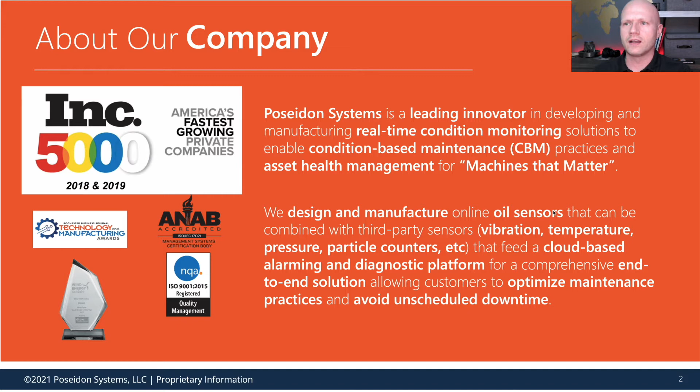I'm the Vice President of Industrial IoT with Poseidon Systems. A little bit about us: we're a leading innovator in developing and manufacturing real-time condition monitoring solutions, really focused around condition-based maintenance. A lot of our technologies and core competencies are around oil sensors and oil sensing technology, and how you integrate that back into the cloud and run diagnostics, providing a full end-to-end solution for our customers. That really allows a lot of our customers to use this information to optimize maintenance practices and avoid unscheduled downtime and other things like that. We'll talk a little bit more about that today.

For some of you, IoT might be a little bit new and you might not have a lot of background around that. As a summary, it's really billions of industrial devices connected to a network sharing data. It can be anything from a temperature sensor to other things within the industrial realm, connected back, sharing that data, and allowing you to garner some sort of value from it.

When we compare regular IoT to IIoT, the industrial IoT, a lot of people get confused. One real difference is that IoT is consumer focused, so you might be thinking of house automation or smartwatches. But in the industrial IoT space, we're focused more on cost savings and efficiency of industrial equipment—not so much for fun, but to help drive efficiency and improvements in cost savings within industrial equipment.

There's a lot of myths around IIoT. Myth number one is that it's new. It's not really new at all—we've had some sort of SCADA or other systems since the advent of the PLC a long time ago, and ever since that point we've been doing IIoT. Really, the change has happened as technology has advanced and it's become cheaper and easier to connect different sensors and devices back to a data collection point where you could aggregate and use that data. So the innovation in the near recent term was more about scaling the technology a little bit farther.

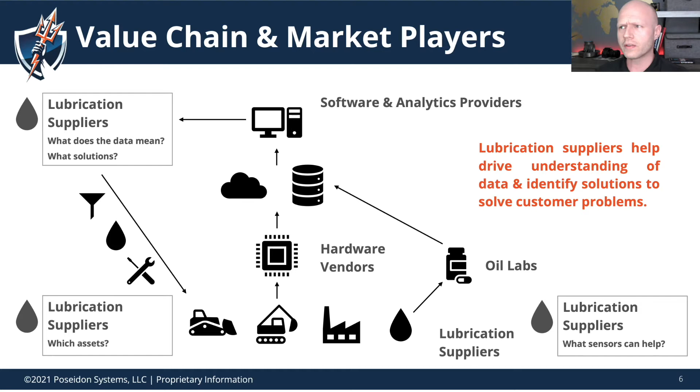And once you've identified a problem, again, lubrication suppliers inherently understand a little bit more about what solutions could be applied to fix the problem. Should you bleed the oil out, change the oil, do a top off, etc. Maybe even switch to a different oil for that application, given the information that's pulled back through the IoT system itself. So there's a lot of value within IoT at a high level.

It contributes mostly to the goal of reducing the total cost of ownership. One way it does that is by increasing process efficiency. Having that data more real time helps you be a little bit more efficient, as opposed to having more manual processes with technicians pulling samples more often.

The improved quality and repeatability with the sensors is quite nice in terms of making sure the data points you have are repeatable and consistent. Overall, it provides a better service to the end customers by understanding the assets a lot better, which can reduce the total cost of ownership as well.

Improving and helping with the troubleshooting and maintenance - the sensors inherently, and the data being collected, should identify more challenges or issues earlier to allow lower cost of replacement or help troubleshoot what's going on, as opposed to going into it blind.

Improving safety with less physical interaction between human and machine, being able to do some of that diagnostics remotely, reducing cost and downtime by catching things earlier and coming up with better solutions so you can reduce downtime in the future. Increased productivity and reliability is a big piece of this.

And then really in the end, extending the equipment and lubricant life. All the things above help do that more efficiently, and all kind of bleed in to help reduce the total cost of ownership by extending the equipment and lubricant life itself.

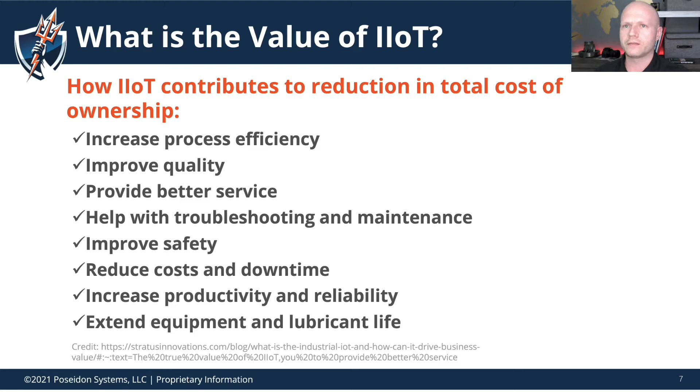We're trying to use lab analysis to help identify what the root cause is, to identify what's going on earlier, and supplement the value of what an IoT system can provide, because the lab utilizes over 150 different tests to provide accurate and repeatable direct measurements - exact measurements of exact properties or contaminations or whatever that might be.

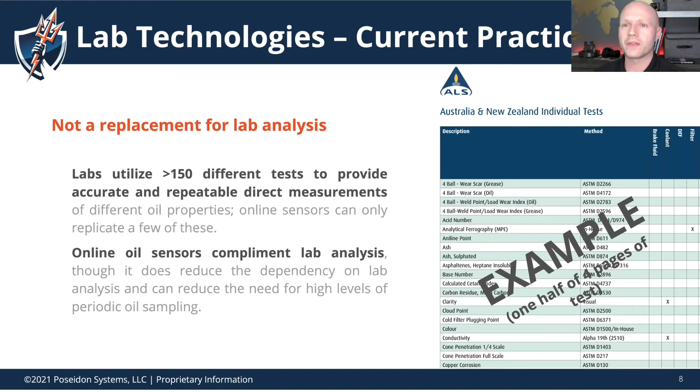Instead of trying to replace that, which can't be done today, we're really trying to complement the lab analysis by identifying sensors and sensor technology that give us the information necessary to understand that there is something wrong - not necessarily in each case exactly what's wrong. I'll show a couple examples of that.

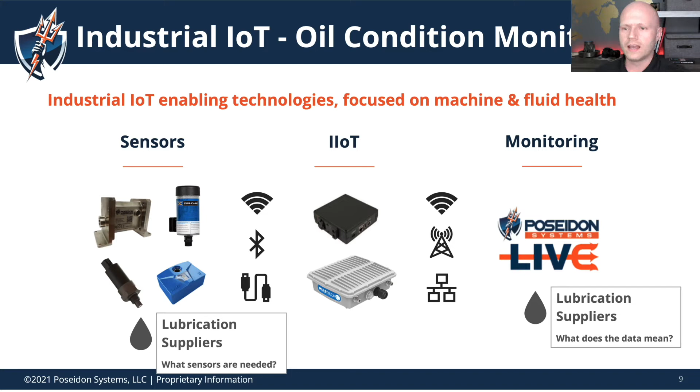Again, as part of that system, where can lubrication suppliers provide that value? What sensors are needed? It's a good discussion to have - what really is going to provide value back based off of that lubricant in that application. And then two, when you do have that data back, what does it mean, what does it look like, and how do you assess the goodness of what that data is telling you?

You take a sample on roughly day one, and then after a couple days, depending on how that site operates, the sample's shipped. During that time, an issue begins to form within that piece of equipment and the lubricant. The oil sample is analyzed and understood, with no issues detected because of when that oil sample was taken. But in that time of processing it, a contaminant can come in, something can start to break down, and while you think the lubricant's doing well, it's actually not, because of when that issue began.

You may not know exactly what's wrong until you do an oil analysis, but at least it allows you to rush and get that moving so you can return that back to service before it causes continued damage to that piece of equipment.

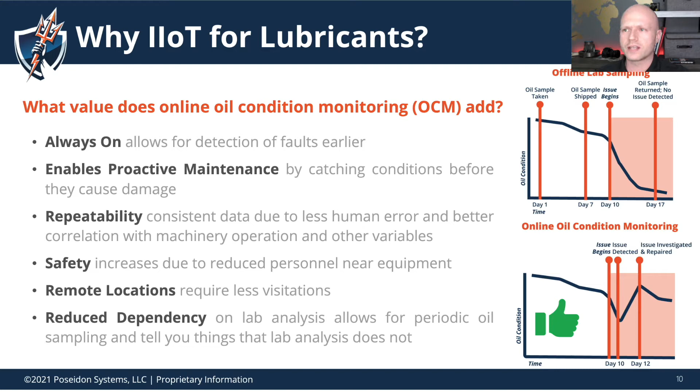From a safety perspective, you're reducing personnel near equipment, so inherently you're improving your safety. And for remote locations, less visitation means you're reducing costs there. Reducing dependency on lab analysis allows you to optimize when you take those samples and use them more efficiently.

Just some examples of online oil sensors: a wear debris sensor, which is focused more on the debris coming off of bearing faults or gear faults or whatever else it is, identifying that there's some sort of early stage fault within the piece of equipment. That's more focused on the health of the asset itself.

On the oil quality side of things, in the bottom left-hand corner, that's going to be more focused on the health of the oil or lubricant itself. There are lots of different sensor types here - water in oil, conductivity, impedance measurements, dielectric, etc. It's really looking for abnormal changes in oil condition.

There are particle counters, which everyone should be familiar with, that give you your ISO cleanliness, which is different than the wear debris. So you're looking at cleanliness of the oil on the bottom right versus the debris from a fault or failure on the upper left.

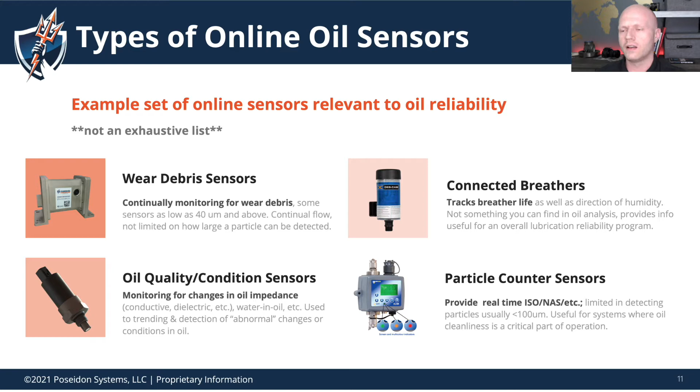And then you have other ancillary connected breather type technologies, which are preventative in terms of trying to keep, in this case, humidity and water out of your system. But now there are connected smart breathers that give you more tracking of the life, the direction of the humidity, that sort of thing, allowing you to know the state of the lubrication system and all the components and how well they're operating to date.

So I want to give you a couple of examples of how online sensing and lab analysis either go hand in hand, complement, or improve each other.

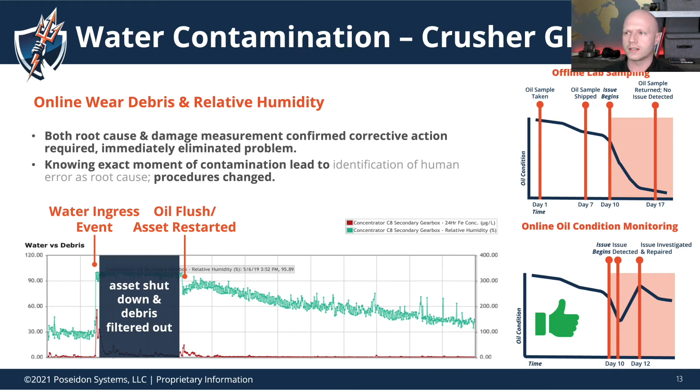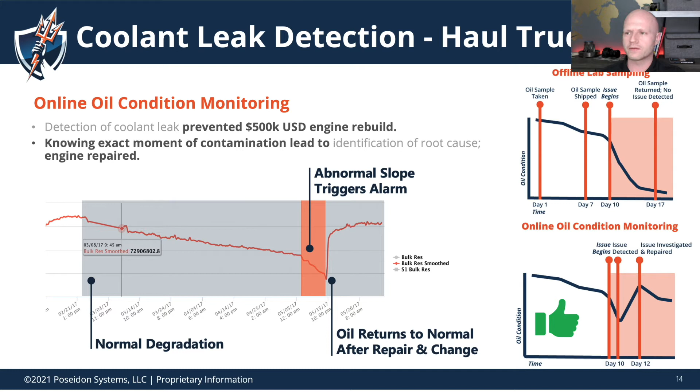From an oil lab analysis standpoint, they were roughly on a 1-month cycle, so they probably would not have caught this for another month or two, depending on how long it took to get the results back.

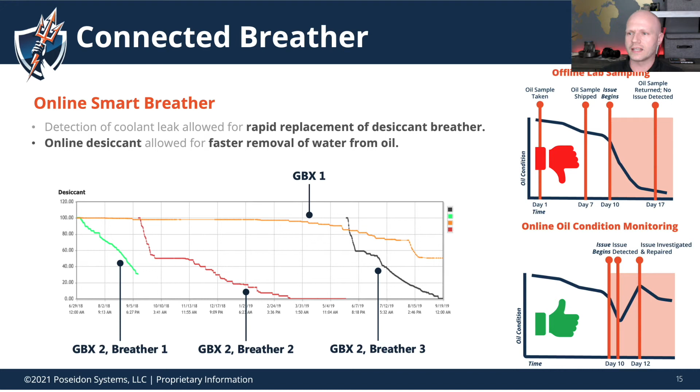What's nice about this, and with IoT in general, is that you want to make it easy to install. If you're just installing single sensors here or there, it's not a big deal. But if lubrication suppliers identify that there are multiple different sensors needed, having one package to install makes it easier to do at a larger scale.

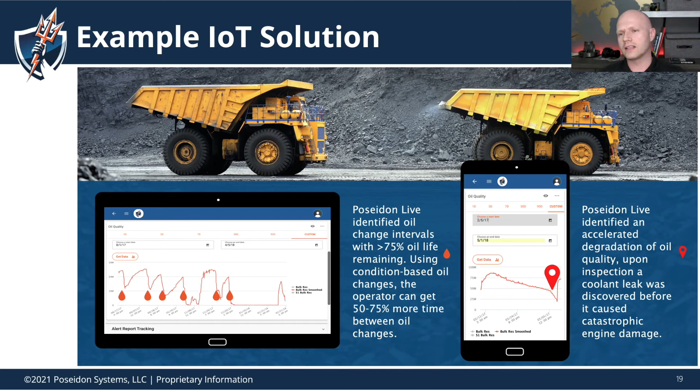A lot of questions come back beyond oil. What else is there? There's obviously not a lot you can do for inline or online monitoring of grease, because it just doesn't move, it doesn't flow anywhere. But you can get kind of closer to that.

So while we may not be able to do online grease monitoring, we can, through devices like this, start to do at least on-site analysis and have that data, the exact same data, flow back into the same system to track and monitor it over time as well.

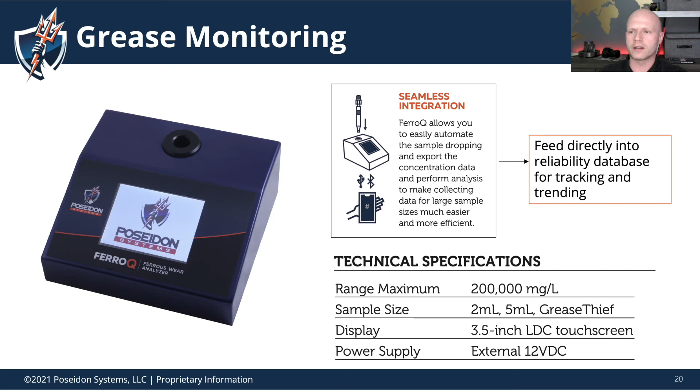So where is the state of IIoT adoption? Some of you may be surprised or not, but it is here. There's a lot of places and industries that have taken it on very quickly. There are some areas though that are behind, so it depends on where you're coming from. Online sensing in general technology, that is the norm. The question is what industry, what sensing technology, that really dictates the level of adoption.

So in the oil condition IIoT space, that is a bit of a laggard compared to some of the other sensors that have been out there for a while. For many reasons, the sensors do matter. Some people may see all the sensors are the same. Really, some of the early sensors in the IoT space for oil condition monitoring have under-delivered the promises.

So there are some newer sensor technologies out there that are finally unlocking those promises. And those improvements are helping speed up the adoption now that we can actually meet the value that's been promised. So again, from that, the value creation is improving. Data platforms are getting better. AI, machine learning are helping to improve the creation of that value from the data. One other big piece of this is cost is reducing.

You obviously need a business case for it. From 5 years ago, I would say the average pricing of different systems has come down almost 50%, depending on what it is. So that helps the business cases quite a bit. Another big piece is having access to higher speed internet, whether it be remote access through cellular connection being faster, having more wired internet access, etc. That's all been improving the access to this.

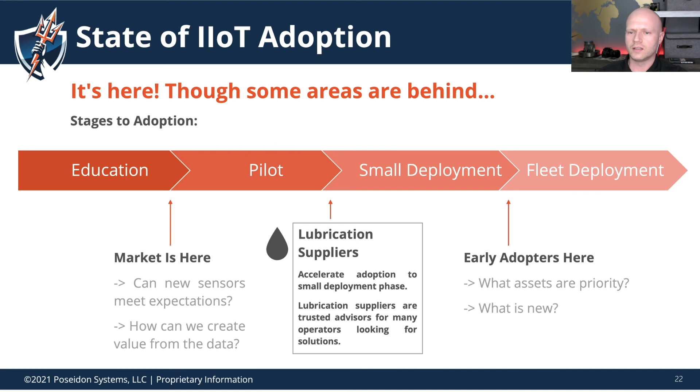It's really important for giving some credibility to the systems that are being installed, and so helps move it past the education phase and the pilot phase to that small deployment phase. And I think lubrication suppliers can play a big part in that.

So what are some of the future of oil IIoT? How's that improving? How's that moving? If we start from the bottom again, we are continually getting improved sensor technology. So if you're getting better data, it does mean more value creation in the end. As those sensor technologies improve, we get better data.

How can lubrication suppliers help with that? Obviously, improve sensor technology. What's missing? What should be there? The data we are getting in certain aspects, is that good enough? Where could it be better? Really, there's a key place to play in improving what that looks like.

Outside of that, we're getting new communication capabilities. 5G is coming in. LoRaWAN is taking off. Wi-Fi 6, which is extremely fast. Wireless is kind of coming on board. So there's new communications that kind of fit the bill a little bit better at a lower cost.

Edge computing is improving. So we're actually moving some of the machine learning and AI from the cloud back onto the asset level for faster decision making where it's necessary. The big data lake kind of space is getting much faster. So we're seeing more data sources being able to be stored in the same location, and it just being extremely fast to run analysis off of that and combine that data together.

And then up at the higher level, the analytics, machine learning and AI continue to improve. They're combining it with MRO data, lab data, sensor data, integrating more of that big data back into the analytics, and then integration with CMMS systems. So you're having that data flow through, and the analysis done helps those doing the maintenance itself with that improved process. Lubrication suppliers can play a huge role in that by providing better analysis.

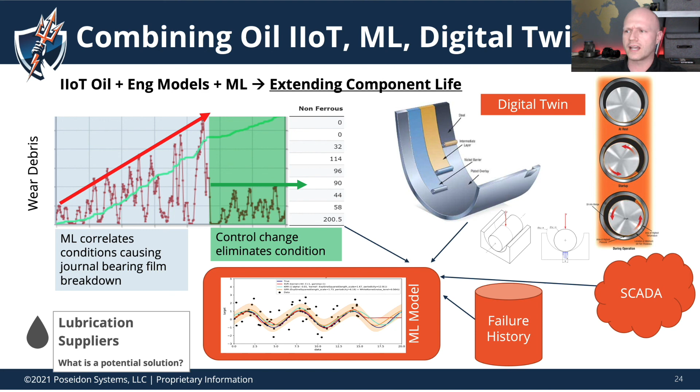And we're already doing this today in some form or fashion, but as we implement all the things from the previous slide into this system and get better feedback from experts in different areas, this only gets better in our ability to extend component life, integrating all these different capabilities together through one overall system.

So to end and highlight a bit here, lubrication suppliers for sure are key participants in the IIoT value chain. There's a lot of different areas. The main ones we've listed here are sensor improvements - lubrication suppliers have insight into what needs monitored for proper lubrication, so feedback to sensor suppliers is extremely critical. If you're feeding back these are the things we have to know to understand the system better, to predict or identify problems, that feedback to sensor manufacturers is extremely important.

If we do have a suite of sensors available, what sensors should we use - that same feedback applies. What formulation is being used that identifies in this particular application? What should we be looking for so we're using the optimized, cost-efficient set of sensors as opposed to everything or not enough? Analysis of the data is also a big piece. If you understand the system, the formulation, the useful life behind it, helping pull value out of the data is an extremely important capability and tool to add to the system.

Once we've identified those problems, what are the solutions for it? What should be done to improve the system? It's not always the manufacturer or machine OEM that designed the system - lubrication suppliers have a piece of the puzzle, and could definitely come up with solutions to improve that, solutions that are more cost efficient, and overall accelerate adoption.